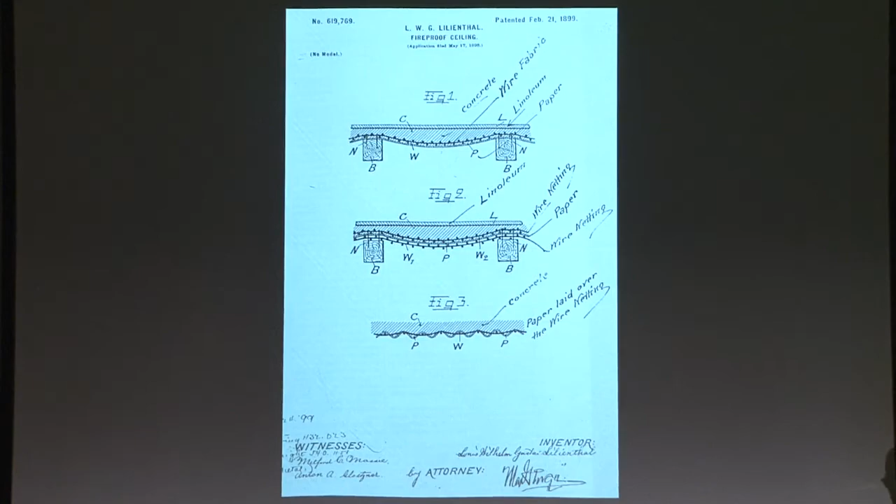His brother was also an inventor. He was racing the Wright brothers to see who would be first to have a heavier-than-air flying machine. There's also James Waller, an Irish engineer, who invented the Ctesiphon system.

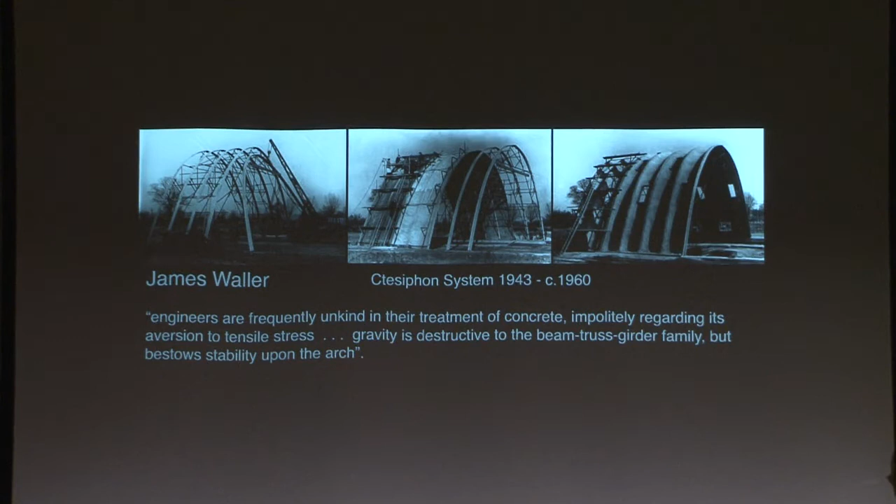Here are parabolic arches with fabric stretched between them, then covered with a thin layer of cement or cement-based mortar. He built thousands of square meters of space using this system. Very successful system, with large factories all over the world, storage buildings, and some workers' housing, but mostly utilitarian buildings.

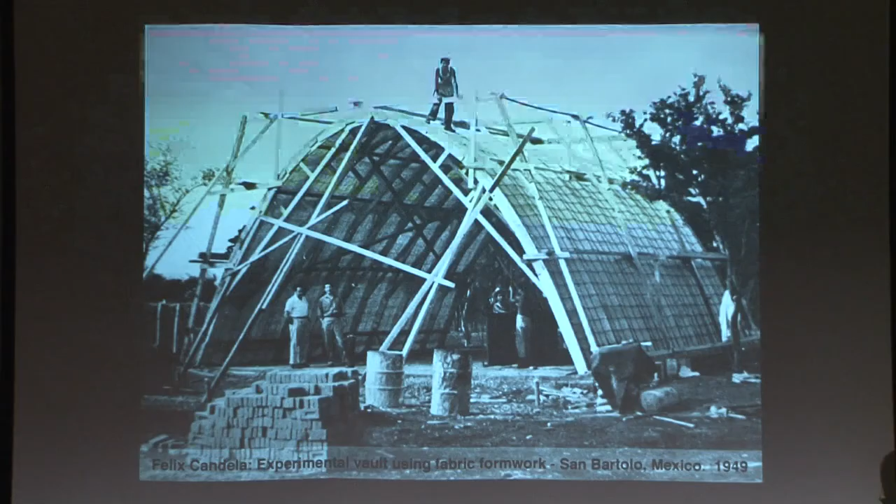This was the system adopted by Felix Candela for his very first thin shell vault. After that, of course, he went off and used other methods, but this was James Waller's method.

There's also Miguel Fisac, the great Spanish architect, who used flexible sheets of plastic for precasting concrete wall panels, really an ornamented surface.

Currently practicing in the field, along with myself. Here's the thing about fabric formwork: it's been invented, used, forgotten, invented, used, forgotten, since the end of the 1800s. In the late 1980s, I discovered it.

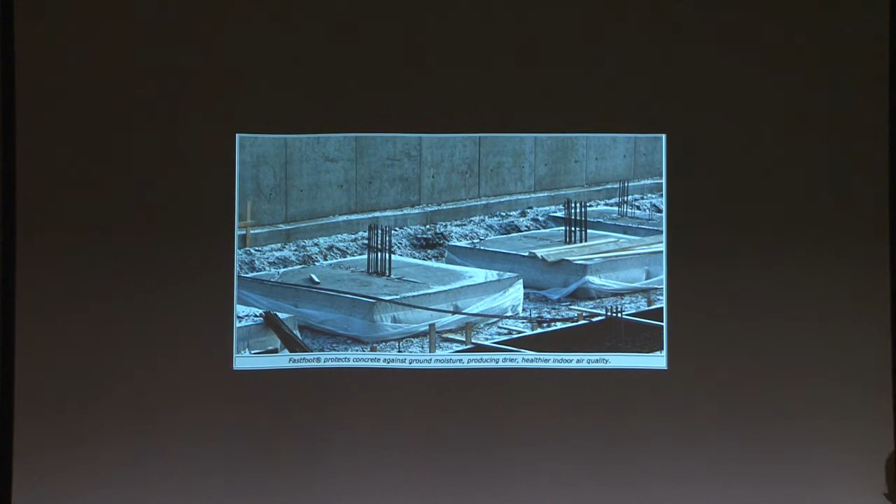Of course, I thought I was the only one till I knew the history. Turns out Rick Fearn was doing it simultaneously, and he founded a company, Fab Form Industries, that produces commercial products for footing molds and also for columns.

There's also Kenzo Unno, who simultaneously was inventing his own fabric-formed wall systems in Japan. He's an architect and builder there.

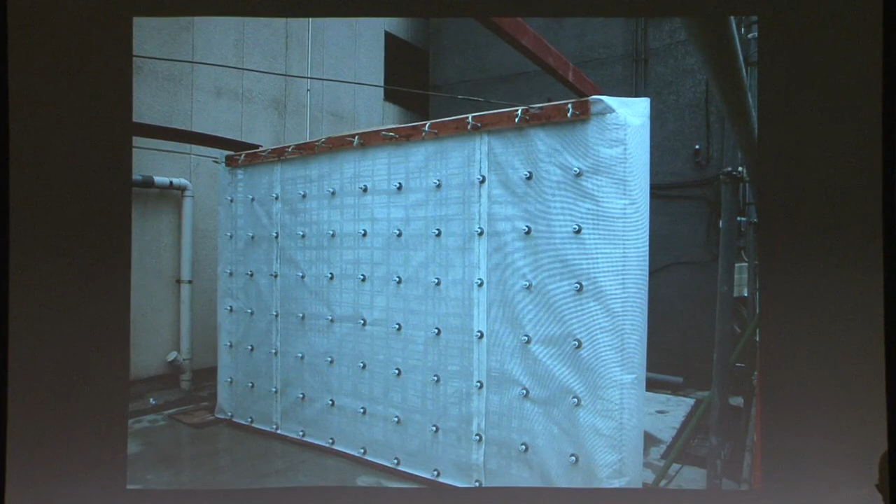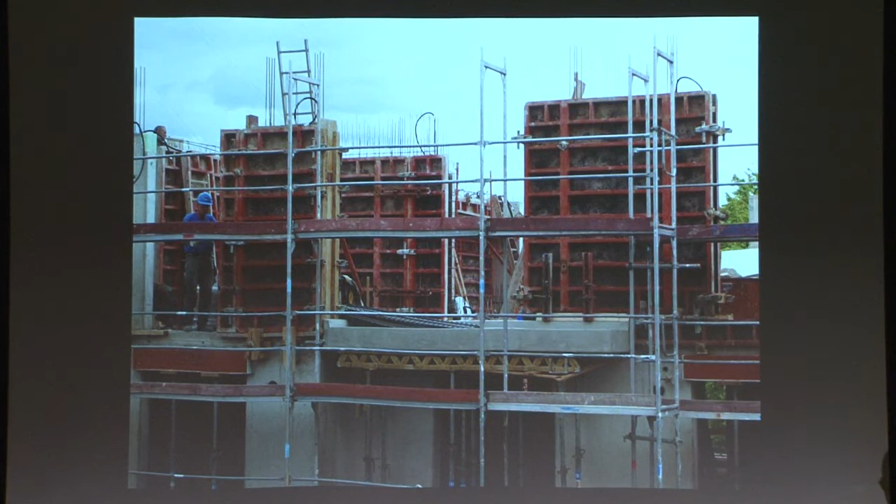These incredibly beautiful concrete walls have very, very simple formworks. Look at that—there's almost nothing to the formwork, almost no material in it at all. If you compare that to standard wall forms, you see something very special happens when you replace a rigid material with a flexible one.

There's also Sandy Lawton, who runs a construction company in Waitsfield, Vermont. It's not a place where a lot of concrete gets built, but look at that thing he's building. He's a small builder, but he got this job—he was the low bidder because he could build this project without a crane, thanks to the extreme lightweight nature of the fabric molds he was using.

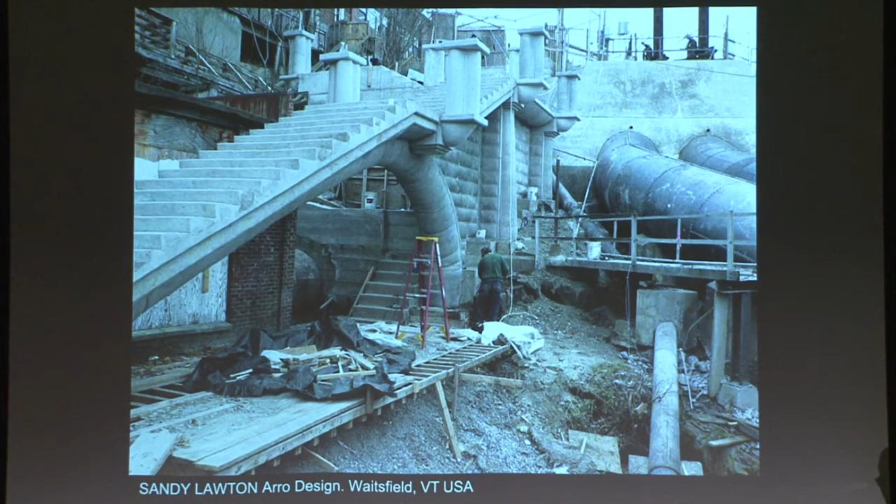My own work in the field is deeply influenced by an art practice that involves drawings and sculptures. In fact, my so-called discovery for myself came out of a sculptural practice.

I was also the only academic involved, so I had the great freedom of sharing what I'm obliged to share as an academic. It's a great privilege to be able to do that, rather than hold onto it as patented work or make it my bread and butter as a builder. So that's been my role in the field.

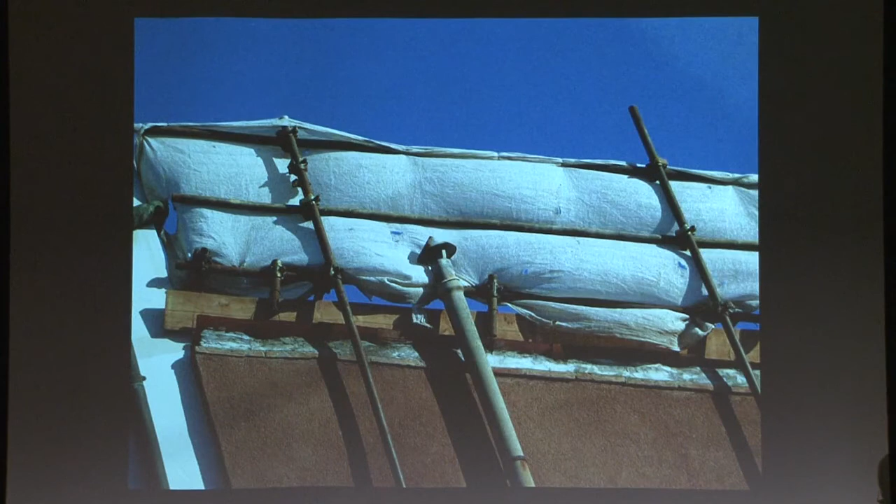For me, as a builder—I was a builder before I ever went to architecture school, and I'm still really a builder.

These really inexpensive, cheap, powerful materials that are used every day in construction for scaffolding or other purposes—it was a kind of dream that these could also be rigidified like a new kind of lithic drapery, but one connected to architecture at the scale of architecture.

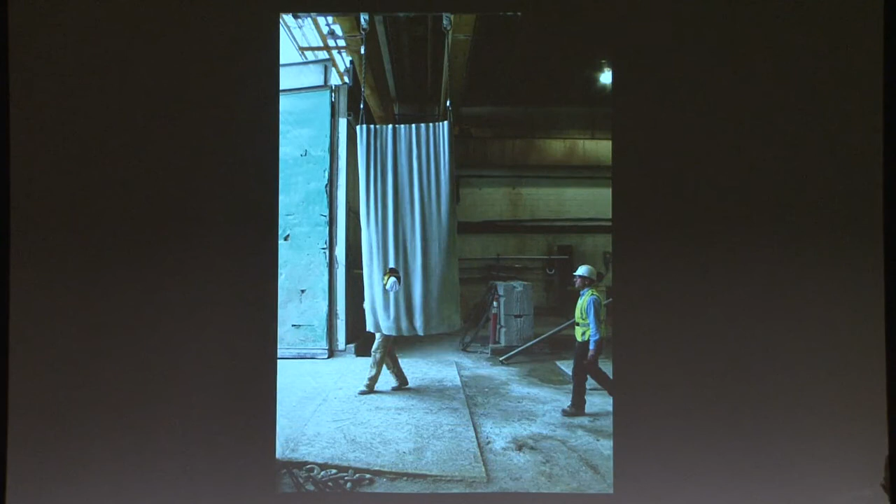There's a drawing of a mold for a curtain wall, and there's the mold being covered with a thin layer of shotcrete, about an inch thick. That's the inch thick shell produced from that mold. You can hang the fabric differently to produce a different shell.

These are deep structures because of the folding of the formwork membrane, but they're very thin—only about an inch thick in the center. The edges are thicker.

This flat sheet could be deployed in a much simpler way, of course. In this case, it's a project I did with Byung-Soo Cho architects in Korea. I didn't do the project with them—I gave them a method for doing these tilt-up walls.

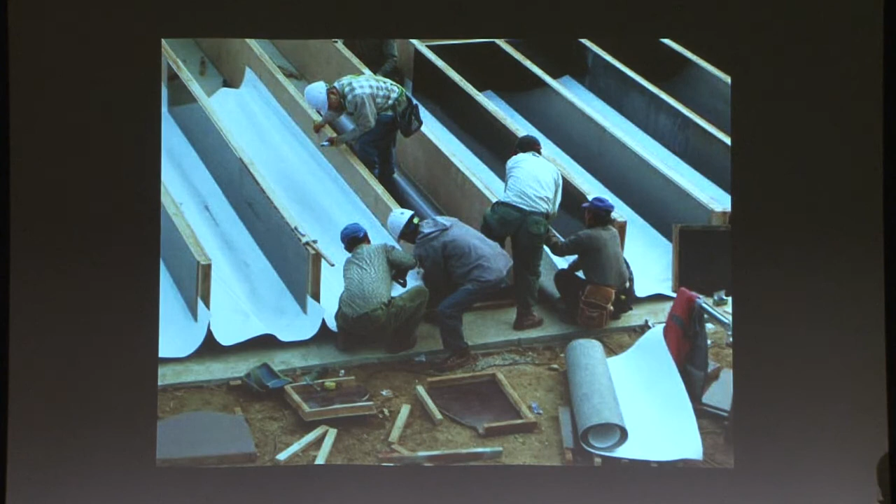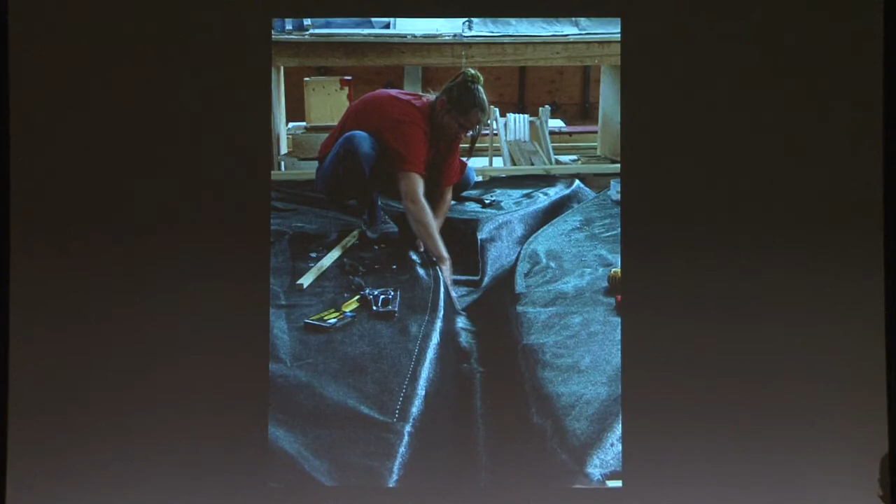It becomes more interesting when you allow the fabric to buckle in two directions. If you take a piece of fabric and push it together along two axes, a flat sheet will spontaneously form a branching volume. By guiding that branching volume in a rigid boundary, you can form all kinds of branching structures using flat sheet fabric molds.

Or you can use the same branching method as the column to make branching beams and so forth. Another example of these branching columns. You can use the flat sheet to make branching ribs, in this case in a precast T-beam.

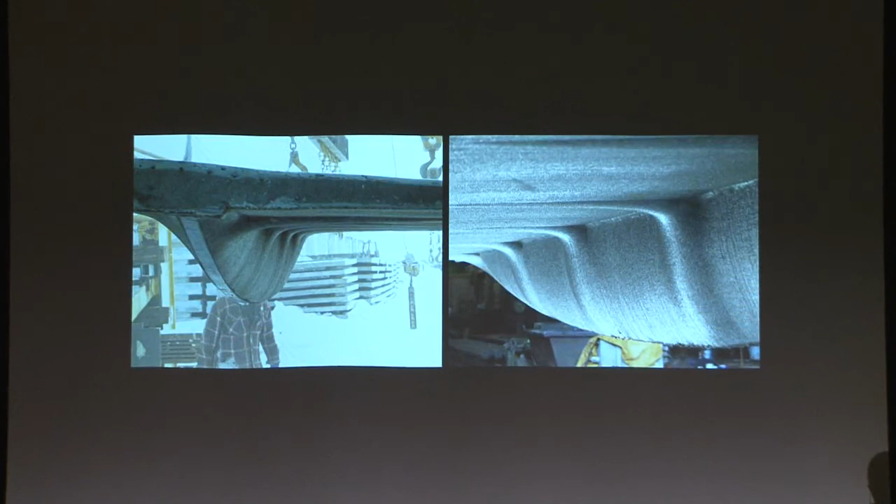When you pour concrete into a permeable mold, the air bubbles bleed out through the skin of the mold, through the mold wall, so you don't have the problem of air bubbles on the surface finish. Some of the excess mixed water also bleeds out, giving you a stronger concrete. This is from a Masters of Engineering thesis done at the University of Manitoba.

There are complexities to this, but the quality of the concrete at the surface of the cast, at the very least, can be much higher just by using a permeable mold. And the finish is spectacular—a kind of amazing, flawless finish that we come to expect from permeable fabric molds.

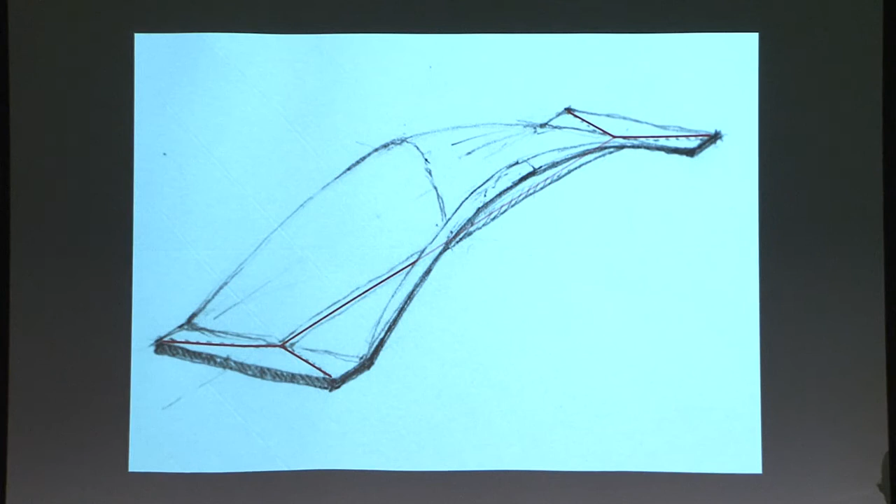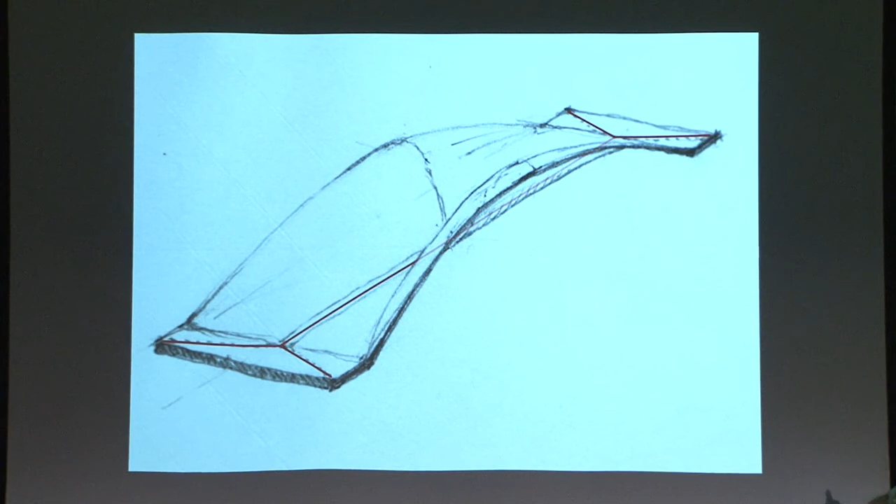You can also form more complex shell shapes with the flat sheet, with a couple of tricks. Here's a design for what I call a flayed beam. It's not really a compression shell, although there are compression shells in it, but it acts as a beam, which is to say it contains its own thrust. Shells are super efficient, but with the support conditions you have to deal with the thrust somehow. Beams are lovely because they exert no thrust on their supports. The idea is that on the straight horizontal portions is where the tension reinforcement goes, and the wings on either side, or maybe we should call them the hips of this thing, are compression shells, funicular compression shells. So this is a kind of reduced schematic of how that would work.

This is how the mold for this shell is made. And here's the shell itself coming off the mold. The mold is hanging downwards, flipped over, so you get a pure funicular form generated by the gravity of the concrete on the mold. And then we have these compression shell flayed beams as the result.

It's a structural design that's notional. It's not calculated other than by a kind of idea on first principles. It's the mold making that I'm involved in.

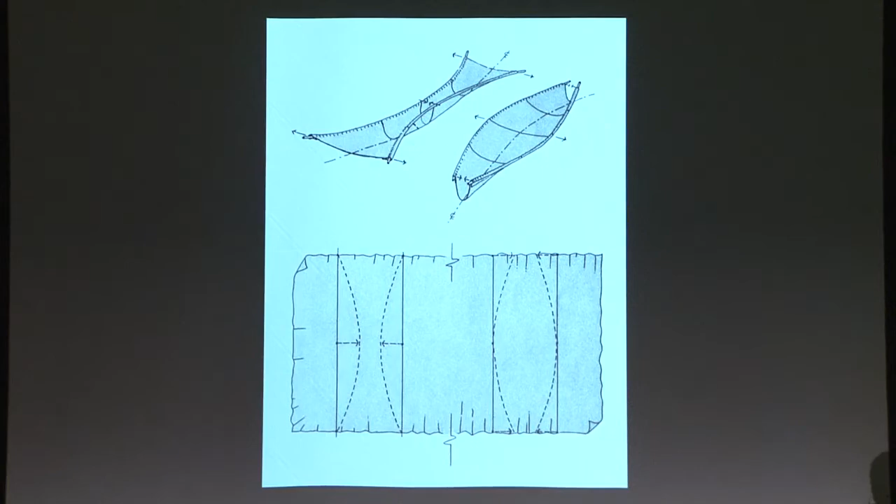You can also take a rectangular sheet, and by stretching it out or ruching it in, you can form variable section beams. So that's a rectangular sheet in a space between two tables, producing this bending moment shaped beam. The rectangular block sketched in around it indicates the notional concrete that might be saved by such a design. The idea is to only place material along the natural force paths of the structure.

That's the flat sheet after it's been stripped from the body of the beam. That's $5 worth of material for the 5-meter beam. That's polypropylene geotextile. Here's a 12-meter beam, like a 40-foot beam.

Again, a rectangular sheet of fabric to cast this bending moment shaped beam. The bottom part of this photograph is a drawing of the bending moment mapped down onto the beam. Through this beam, actually, that I met Ed and John. This goes back a ways, this one.

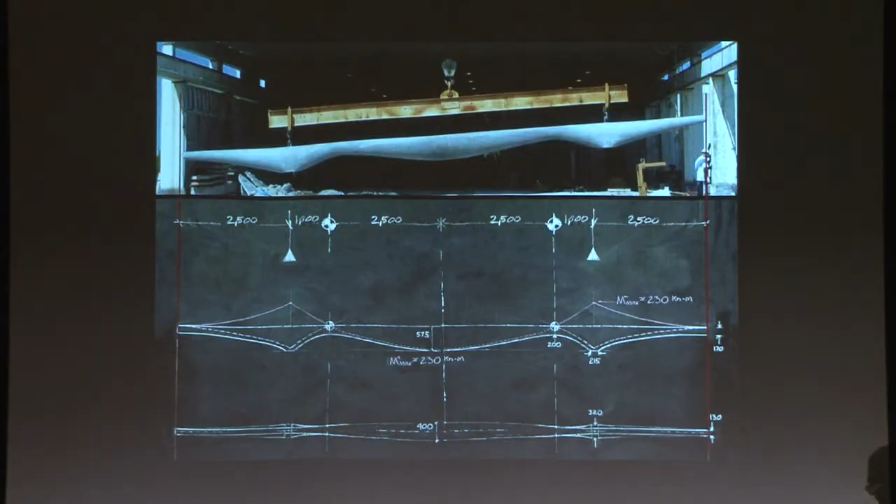So the game would be to try to save this material by more intelligently placing the concrete. And if you can do that with a simple mold, so you're not spending a tremendous amount of money building a fancy pants mold, then that makes maybe the game worth playing.

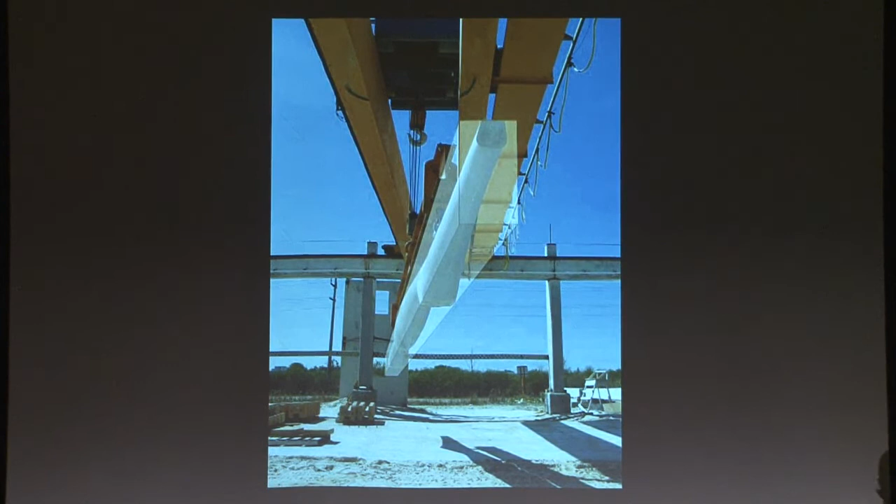We've experimented with any number of different kinds of beam shapes that can be made from simple fabric molds, and this has become the subject of engineering research at a number of different universities around the world. The devil is in the details, and there's much to learn about it because the behavior of these beams is not like a uniform section rectangular beam.

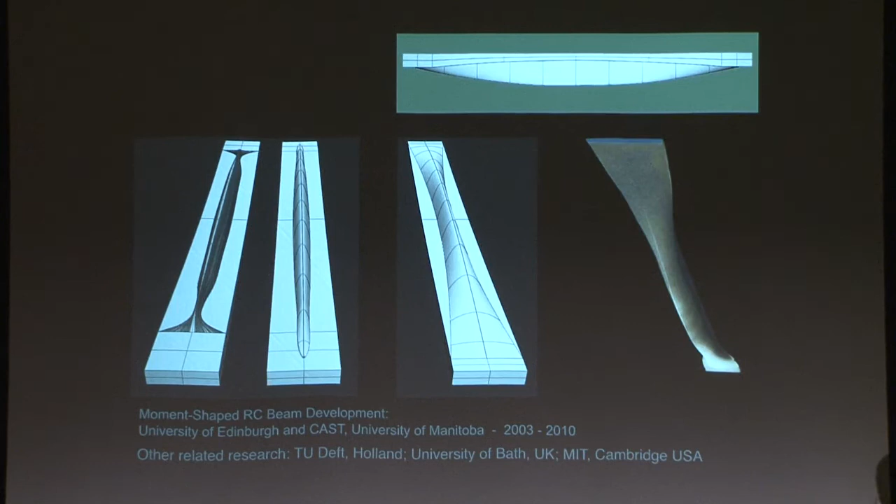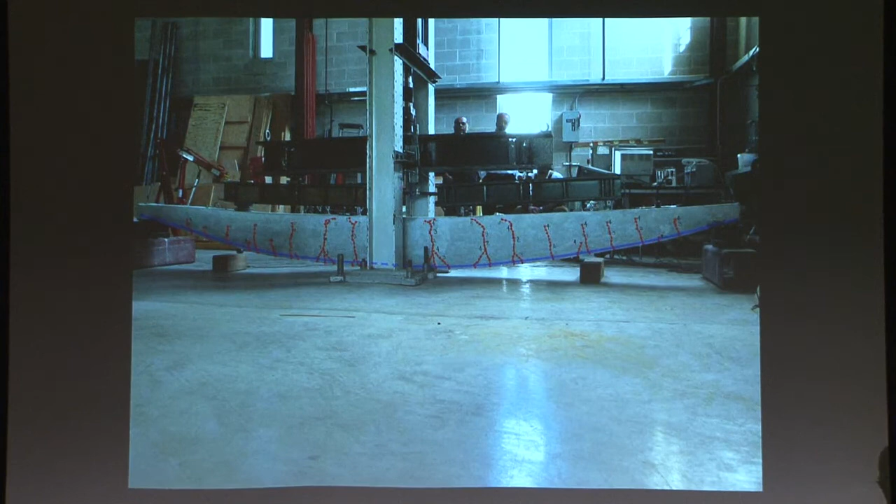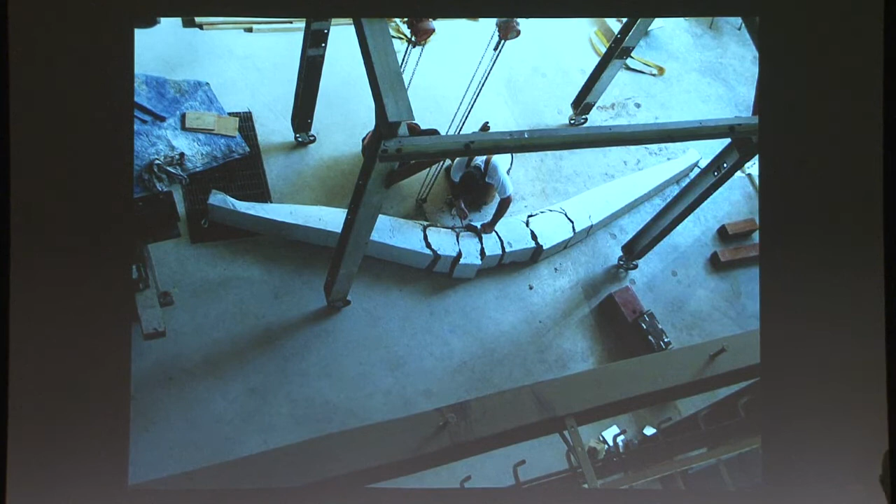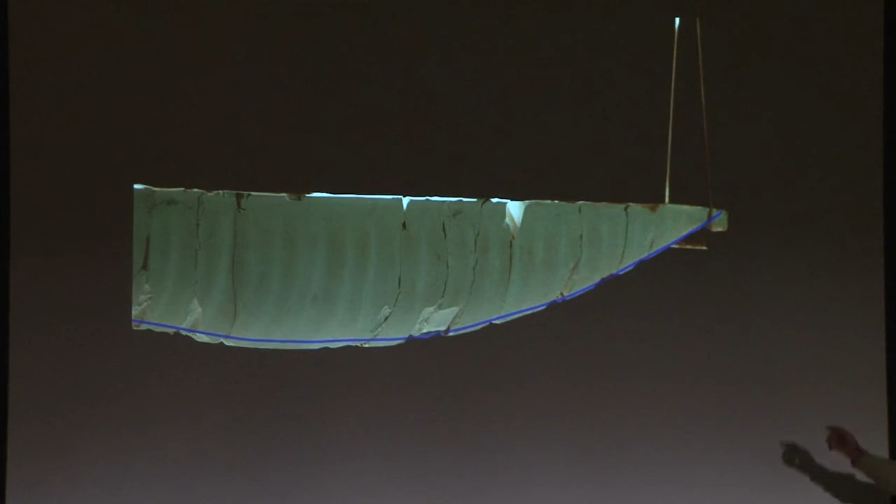That's the beam, after testing, as it's come off the testing rig, and of course it's gone, right? Except it's not gone. You can put it back together again, and it will hold itself up. As this gets loaded, that piece of steel in the bottom takes the tension, and the compression zone is now horizontal across the top of the beam. It's being squeezed back together again by its own load.

So we made a beam that lived a life as a beam, we thought, and died as a beam, we thought, except it was resurrected as an arch, but a backwards arch. And maybe it was an arch all along, and we just thought it was a beam, but it was living the life of an arch.

That leads us to the secret life of structures. Now, I'm going to read to you a very early structural text. This is by Leonardo da Vinci, who is trying to understand what a force is, something which remains mysterious, by the way, I would say, anyway.

So this is from Leonardo's Hymn to Force. I don't know if he called it the Hymn to Force or whether that's how it got translated, but I'll read you this.

It's a series of fragments, let's say. Force is the same throughout, and the whole is in every part of it. Force is a spiritual power, an invisible energy, which is imparted by violence from without to all bodies out of their natural balance.

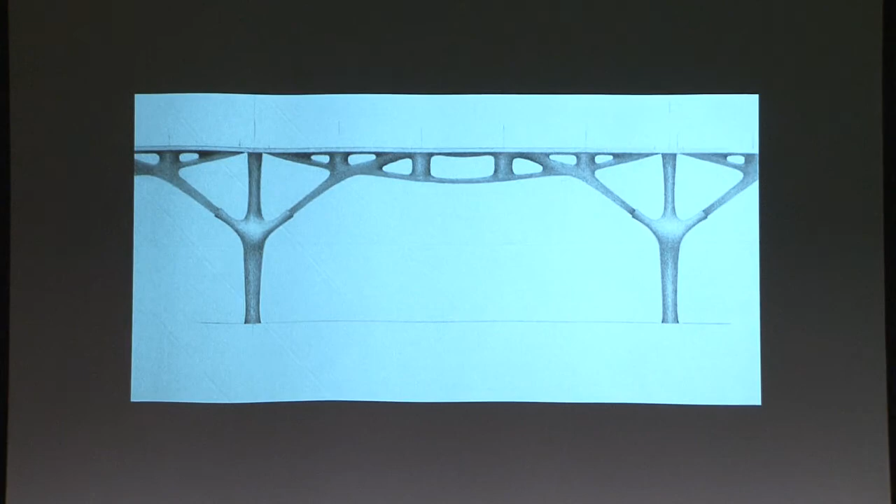The sound of this exchange, like all sound, is invisible, because the voice given to matter is driven by force, and force, as we know, has no body of its own. However, visible evidence of these soundings may be found in certain subtle traces or geometric stains left in matter when it is flooded by force—arcs of desire, and a secret body of internal resistance.

This calling of structural members is their way of bridging the distance opened up by their parting. We call this opened distance space, or more specifically, habitable space, as we ourselves, unlike other forms of matter, are limited to a life lived in a space in between structure.

It can be rightfully said that our lives are lived between the silent call and response of the structural members that surround us and the earth from which they are extracted.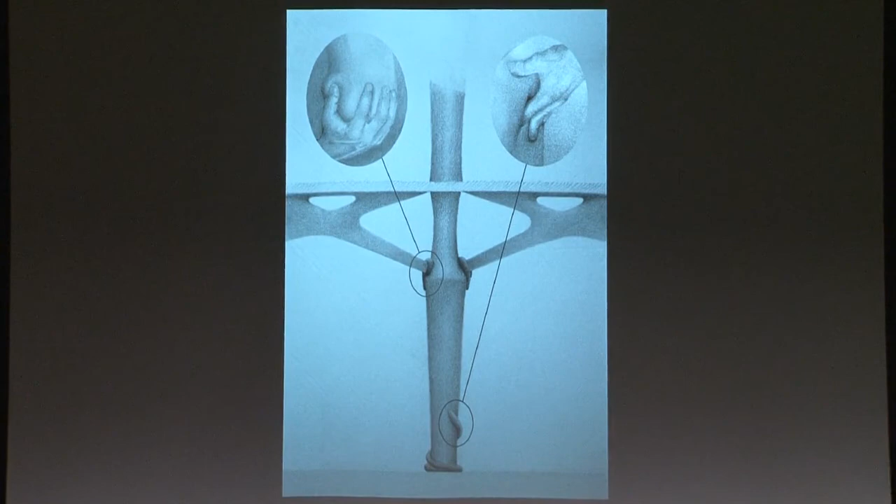My failure is named my strength. With its capacity for action in the world, a structural material first confronts its inherent frailties as well, with a quickening self-knowledge of both power and weakness. Thus is produced an antagonistic sense of both exaltation and doubt.

Exaltation from the discovery of the muscular potency that comes from being a structural member, and doubt, or fear, because with this potency comes a knowledge of the fall, that is, a felt knowledge of inherent physical limitations and the prospect of annihilation as a member through failure. This is the source of a deep ambivalence.

Failure as a member, though feared as a sundering or cleavage of body, would result in the longed-for reunification or cleaving with the earth. It is because of this darker sense of ambivalence that we signify a material strength as its point of failure. You know this, like a steel, 60,000 PSI steel is named that because it fails at 60,000 PSI.

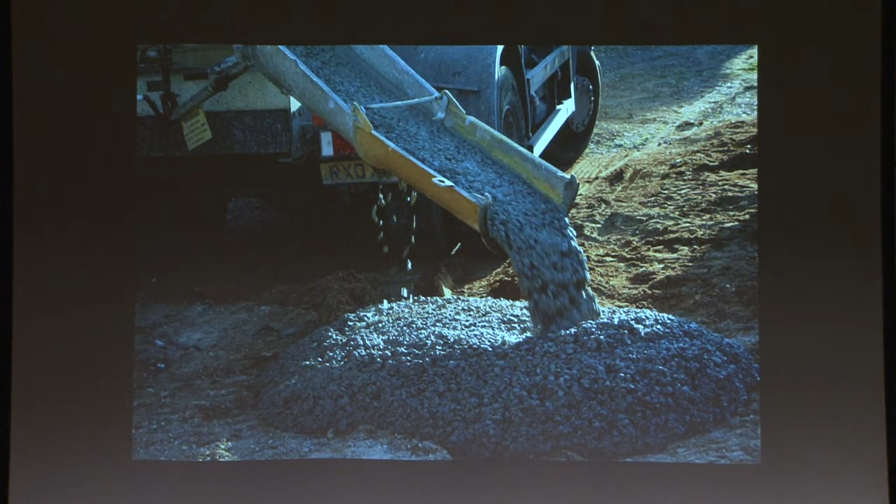In a relaxed state, matter's consciousness appears limited to a knowledge or a dream of its material boundaries. A material's latent ability for work lies dormant, and its fate to labor is obscured beyond the flat horizon of this limited existential condition.

Some say that the only desire of a material in a relaxed state is to be left alone. Others say that this dormant state constitutes a kind of material limbo in which matter's true calling is obscured and obstructed by the narcotic fog of quiescence.

External forces. External forces, as the name suggests, are imposed on a structure or structural member from outside, either by the weight of other materials or objects, by wind, by the movement of the earth, the impact of projectiles, etc.

These kinds of imposed loads are easily identified as external and require no further discussion. The weight of the structure or structural member itself, its dead weight, however, is also an external force. It may be surprising to learn that the weight of your arm does not properly belong to your arm. What you feel when you hold out your arm is in truth the earth's external call for its return.

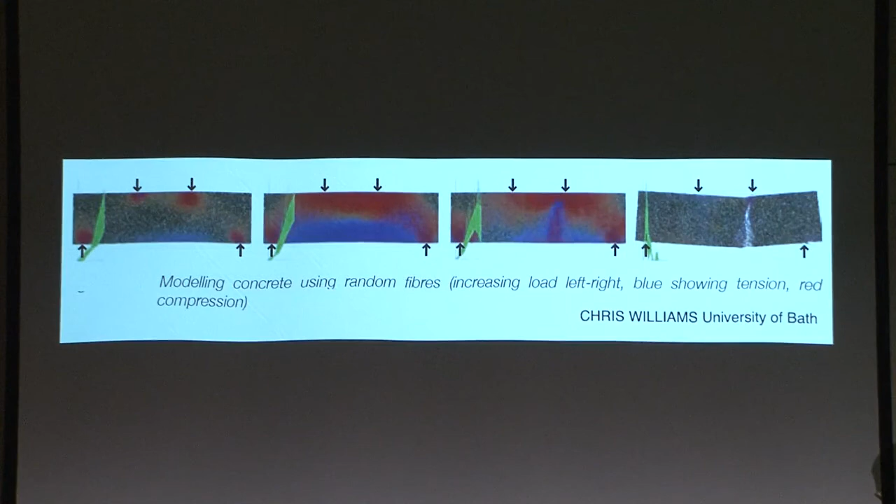When subjected to an external force, a resisting member spontaneously acquires a three-dimensional pattern of mirrored resistance within itself. The form this pattern creates constitutes a dreamed of resisting body, living within the external shape of the member itself.

This somatic shape of resistance is force dreaming its own body, invisibly, within the physical body of the member. This dreamed of shape is the closest shape to weightless falling that force can muster within a material body.

This dreamed of body of internal resistance is called a resisting soma and corresponds to what matter itself hopes for as the least painful distribution of its suffering or stress under load.

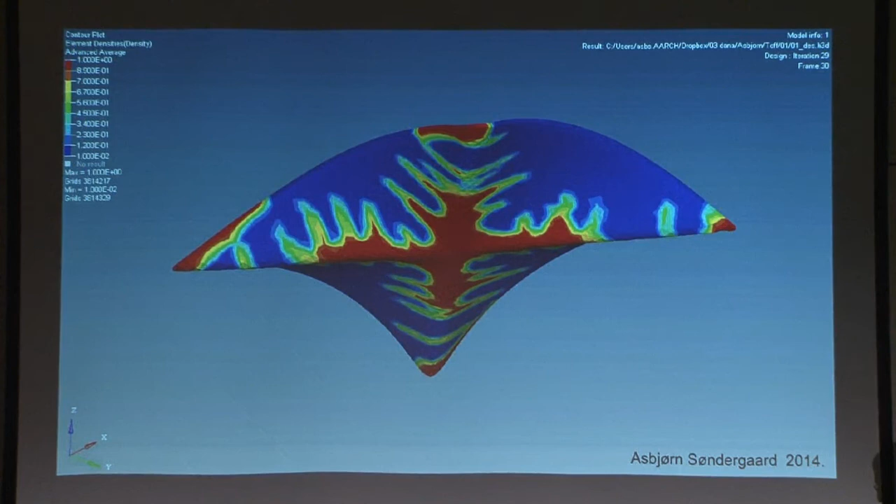At the same time, this shape also corresponds to force's pitiless desire for the path of least resistance towards the earth. In this way, the shape of force's occupation of matter is that which will cause the least internal pain and which can be achieved with the least possible work.

So these are, we could say, some of the stories that we tell about this invisible soma of resistance.

These shapes haunt the body of structural members under load and are said to change their color, or what amounts to color, according to the level of pain induced within the material body of the member. If one internal pattern fails to provide resistance, or the pain becomes too great, the resisting soma will shift within itself to an alternate shape of resistance until it finds the one pattern that best satisfies these desires.

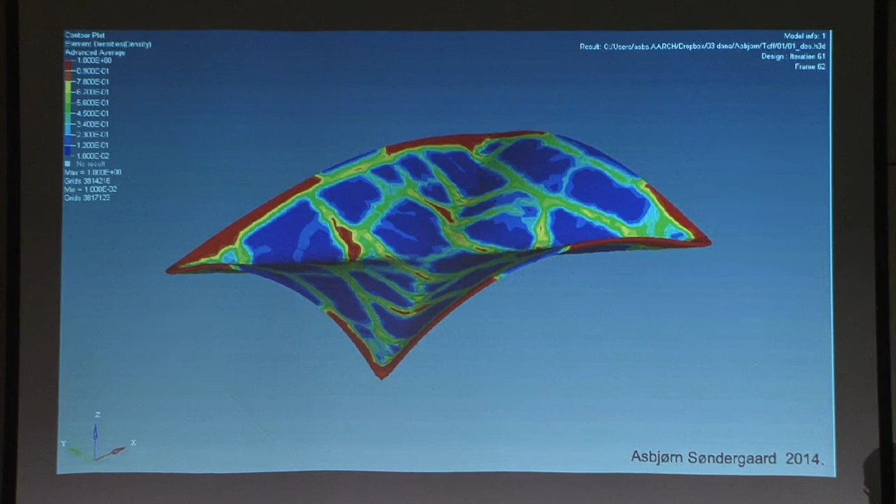If a suitable shape for a resisting soma cannot be found within the body of the member, the structure will fail and fall, thus collapsing and convening both matter and force to the earth again.

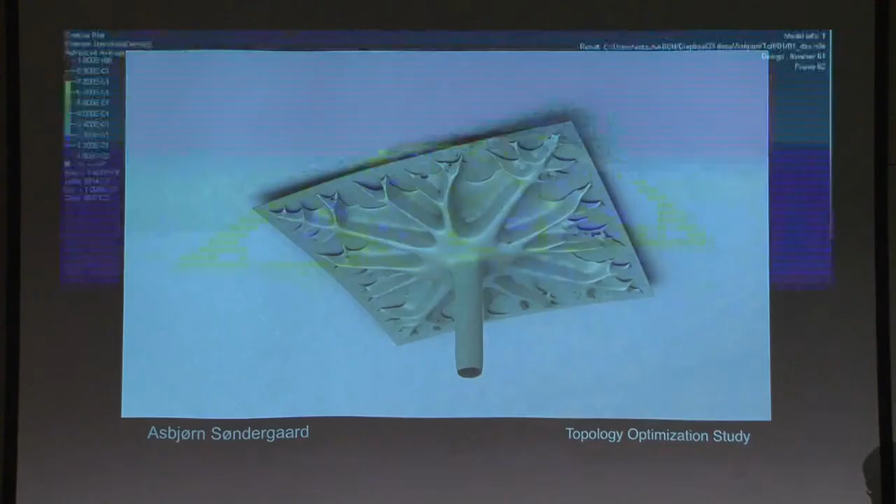The reflexive adjustment of a material's pattern of internal resistance is as quick as thought, as fluid as dreaming. Its genius is marked by its rapidity and improvisational brilliance.

Any thought or dream, however, still needs time to assemble itself, and this is why the speed with which an external force delivers itself to a structural member is so important. If a member is loaded slowly, or if the load upon it changes slowly, matter is given time to think, to try out a full repertoire of patterns for generating its dreamed-of body of internal resistance, and to shape new ones if necessary. If the load arrives quickly as an impact, there is less time for matter to think through its options. Thus, a sudden impact is more likely to cause failure.

Shape and suffering. A change in applied external force will change not only the internal soma of resistance, but the global shape of the member itself, as the distances between its constituent particles change, the atoms.

Any change in the external shape of the member will cause subsequent changes in the shape of the soma of resistance occupying that body. For the internal soma of resistance knows and responds to the shape of its material host.

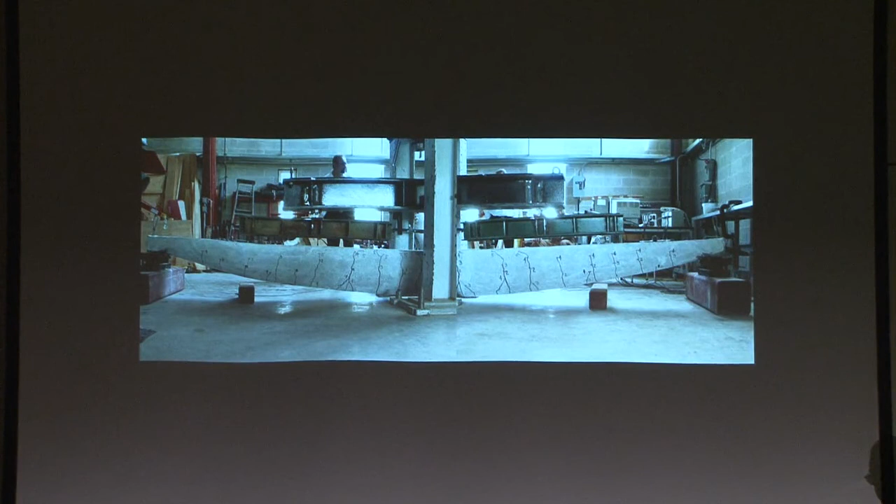This provisional change of shape is not so much a surrender to external force as much as a way of embodying and subsuming an external force. Such resistance is achieved through a cunning accommodation, a cleverly negotiated acquiescence to a temporary, though fated, state of being.

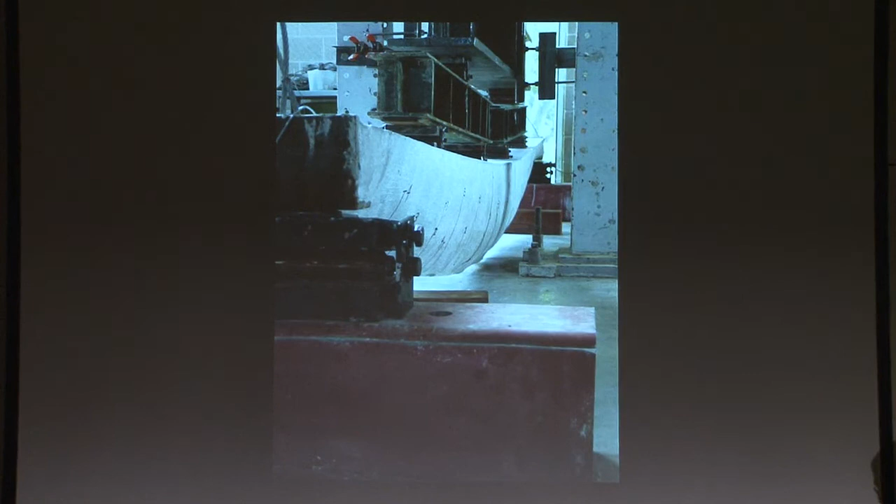Still others say that structural materials metabolize external force into internal energy, what we would call strain energy. This metabolic capacity displays a secret and invisible transformative power to bring quiescent matter to consciousness, marking the beginning of a structural life, at once an internal awakening and a fulfillment through action in the world.

However described, this fundamental spatializing relationship between force and matter is colored by the suffering of a structural member, the suffering a structural member is obliged to endure under extreme or highly concentrated loads, which taken to its extreme limits can lead to rupture. This suffering is called stress. The limit of a material's suffering before rupture is called its strength.

Now, the text gets rather strange now, so jump off another ledge.

Theories of time in static structures. Force has been understood since antiquity as the origin and cause of motion. Newton himself defined force precisely in terms of motion and change.

Concurrently, motion is required for the marking and measuring of time. Some go so far as to say that time exists by virtue of motion in space. Thus, both force and time are joined, as it were, in what we may call the body of motion.

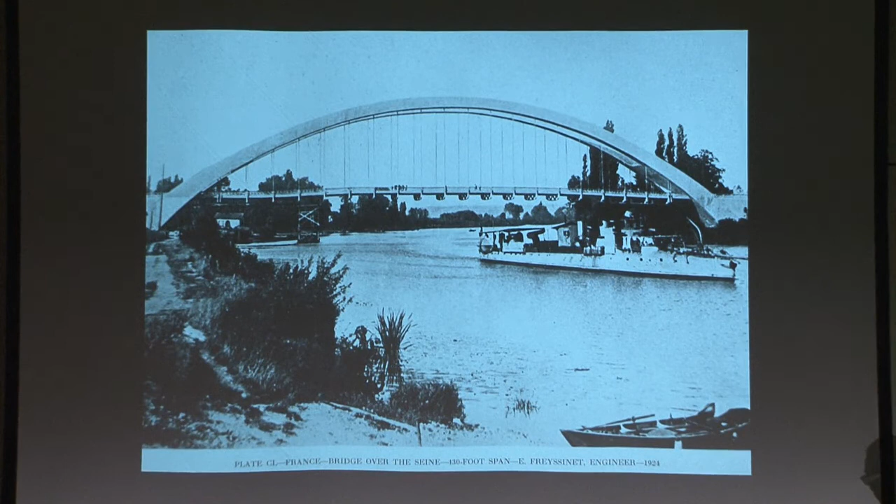Mr. Muybridge's recent rapid shutter photographic cameras provide a worthy object of instruction in this regard, by giving us a vivid example of an infinitesimal stoppage of time holding fixed a dynamic motion. This is the graphic equivalent of a static structure. However, the simile only goes so far, as the photograph is merely an illusion, and no physical force is generated within the illusory body thus held.

The theory of the abeyance of time in static structures is not, however, acceptable to all observers. For some, it is axiomatic that time must exist independent of matter or motion. The obvious yet problematic connections between force, motion, and time are, for these observers, resolved through an alternate theory called the theory of apparent stasis. This theory holds that stasis is itself illusory, and that all apparently static structures are, in fact, in another kind of motion.

This illusion of stasis is the result of a phenomena that is the mirrored opposite of the illusion displayed in the spinning zoetrope or moving picture. In the moving picture, a multitude of sequenced static images produce the compelling illusion of motion through what is called persistence of vision. In a so-called static structure, the inverse occurs, as a multitude of sequenced dynamic exchanges produces a compelling illusion of stasis.